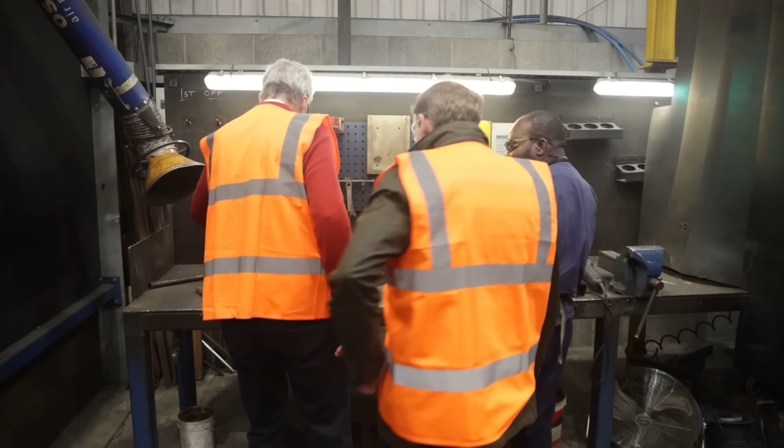He's hot, I'll show you one. So we're hard facing these. This is another long life product. As in like hard facing, like we would do in the workshop? Yes, but it's obviously a special alloy of hard facing material. So this will probably double the life of the product if this wasn't on.

So is this a range that you would do, or is this what Lemken wants you to do? This is for the aftermarket, we don't make the Lemken. This product is sold probably to Spaldings and similar people in Germany.

You were just explaining to me earlier there's now going to be a problem potentially getting hold of tungsten, so do you think you'll see more of this next year, more so than tungsten points? I think if it continues, the farmer will have no choice because the price is going to push it past the economic stage. So I think probably the cheaper, longer life coatings, which you'll probably see later on, will play into our hands. We might end up having to change a few more points this year just because of the price differential. Good for you, bad for us.

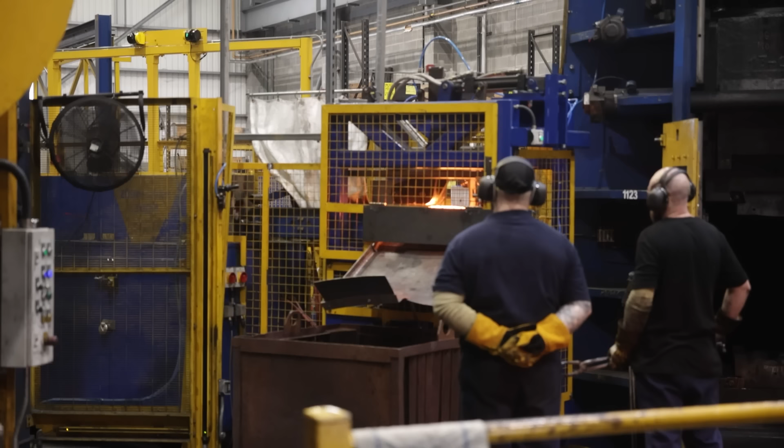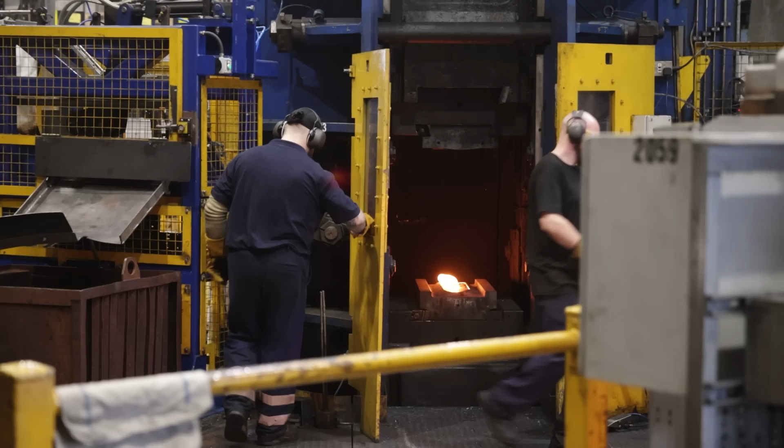So Ian, what are we looking at? It's about to drop down, that's a 50mm round billet, we call it. What temperature has that been heated to? Around 950 degrees. So you're buying those in that form? In long lengths. Now we're going to see the press, that's one hit.

And that's just compressing that into a mould, compressing all the steel into a flat shape. What sort of tonnage is that? Well, this is about the equivalent of 2,500 tonnes, pressure comes mainly from air. And that's got the shape, so the guy takes it over to the other press.

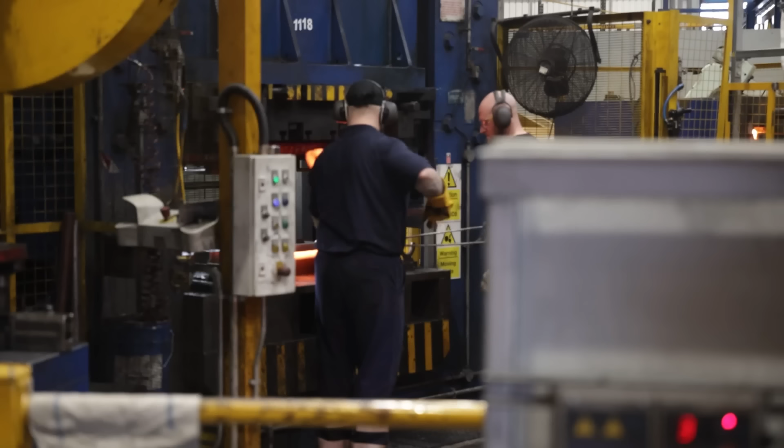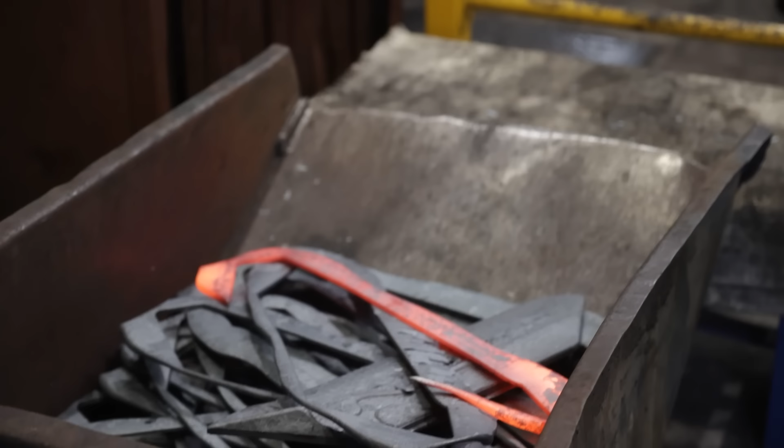What they're doing now is clipping the excess away around the edge of the profile. That's what you've got in this bin, what we call the skeleton. So what do you do with that, is that wasted? That's scrap. You can't reuse that? Well, it is reused, we sell this at about 250 quid a tonne for scrap. It goes back into the steel process.

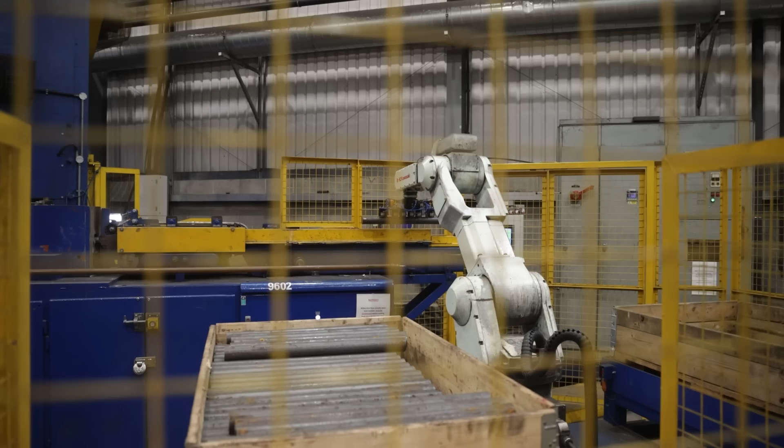So the robot is here, he's picking what we call the billet out from here. You can see he's got magnetic clamps on there, so he's waiting now to drop it onto the production line.

This is the whole induction heater here. What, just in those boxes? Yeah, that's the electrical. And what is causing the heat, induction? So it's basically heating from the inside of the steel outwards, like a microwave basically. But where's it getting its power from? From the electric.

Is that a limitation in expanding a factory for you, to be able to have enough gas and enough electric? Definitely. So have you had periods where you've actually struggled to grow because there hasn't been enough of the two main sources? It's been a bit tight now and again, yes. But there's less manufacturing going on, did that release you more capacity? We're using more because people are no longer in the region, in this particular area.

And you've got a lot of good skilled people in Sheffield, I would assume, to be able to employ. We have a huge infrastructure of both people and services, so anything that needs repairing, it's fairly easy for us to find that contract to repair it quickly and easily for us, because it's a culture around here. So that actually makes Sheffield a very good manufacturing place. I would say we're one of the best in the country in terms of the infrastructure and support we get.

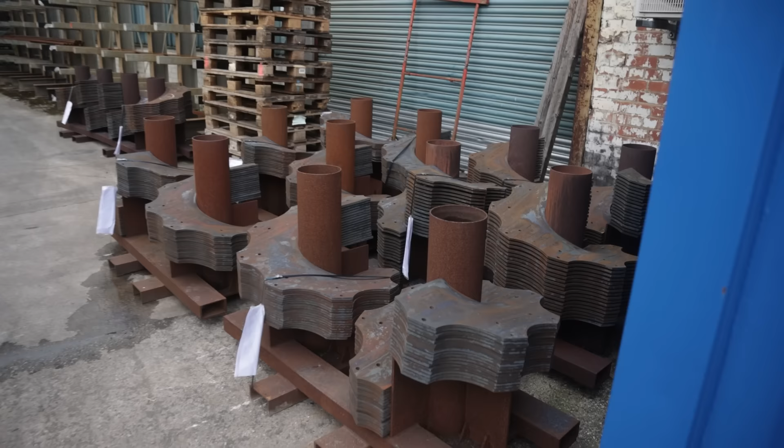Yeah, interesting. These are for the muck spreaders. So the customer welds left and right together to create the spiral. All these are hardened parts. So this would go on, say, a Bunning or a Richard Western muck spreader or something of that order. Yeah, I think these are Bunning.

And then these machines, I'm assuming, are going all over the world, are they? To go America, Australia, South Africa, you name it. And so that part, do you make the shaft as well? No, so you make this part, and then that goes to them. They weld that on. Yes. And what's so special about these?

Well, these are through hardened boron steel, 30 carbon. So compared to an unhardened part, these will probably wear 5 times longer than the hard steel. And it will take the abuse of rocks and things like that. Yes, they don't bend. The customer now has no problems with stony conditions.

And how did you end up getting that contract? About 18 months of painful development. Oh, really? Yes, to try and design it to make it work? Yes, to make it work.

And to develop that, I'm assuming you draw it on a CAD, but then was it going out onto the machines to actually trial them? No, we did what we had. The customer sent us up a long tube, the axle effectively, and then it was just trialling on the machine on and off and trying to work out how we stop distortion. That took us about 18 months to do on and off the machine.

Because the heat was altering the angles? Well, the heat would cause a problem, because obviously it's really important in a spiral that you have the flow of the muck going through, and if we didn't get it consistently right, it would stop the natural flow. So, but we solved that. It took time, but that's what we did. And now we just produce thousands and thousands of these now.

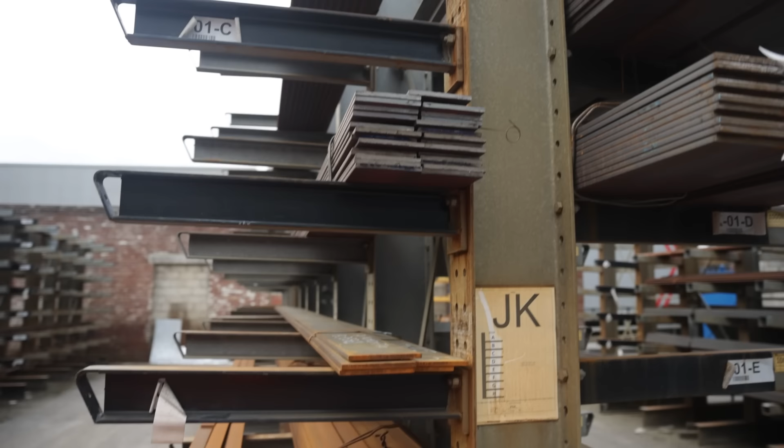Is that how they do it? They wire it up to weight? This is Spanish steel, this is Swedish steel. They're the two sort of places that steel generally comes from. Well, certainly for us, yes. And so we now have just-in-time deliveries.

And Port Talbot is closed, so you can't get anything from there. No, closed. So that means you've had to go internationally to get your steel. Yes. And does Sweden, for example, I wouldn't think of Sweden and steel, but do they have a roaring business over there in steel? They're very big steel producers.

Right. And very specialist, because that's what we're looking for. We're looking for high quality, consistency in our supply chain. You can deliver on time, good price, but also high quality.

So now that you've got a war, have you got a problem with steel coming from either of those two countries? Not in terms of supply, but definitely in terms of price. Oh, so the price has jumped? Is jumping up, daily, continuously. Because the biggest cost in steel making is now energy. But is energy as bad in Spain and Sweden as it is in the UK? We've probably got one of the highest costs of energy within Europe.

It's more painful for us because we've got so many government levies to develop nuclear and also decommission the old nuclear plants. So we've got quite a high duty or tax on what we pay, particularly for electricity. It's painful, and it just leads to a lot of uncertainty.

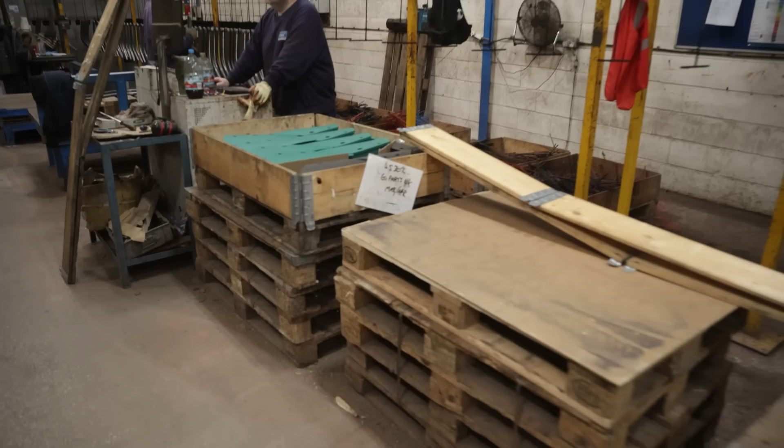So these guys are putting the materials on the racks, and then these are just going along and dropping in, coming back up. Do they go to get baked or heated or something? Yes, there's a baker behind here, it goes round on the rail into the oven, baked at about 180 degrees, and then cooled off.

By the time it comes off the line, it's obviously dry for the guys to handle, not too hot either. No, they've got cooling fans. A lot depends on the ambient temperatures outside.

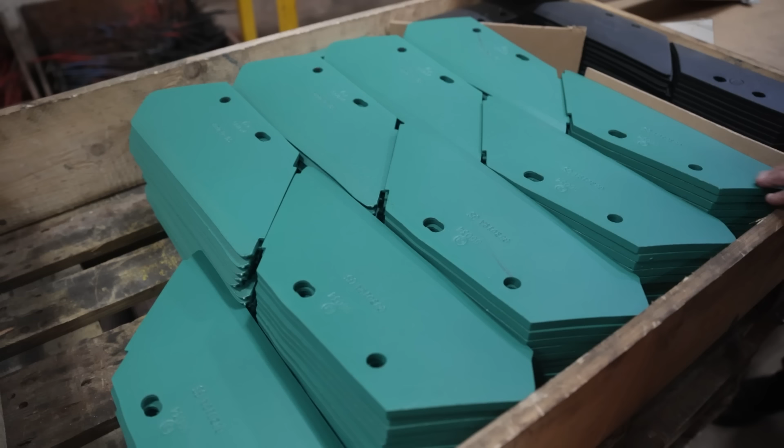And that is effectively a finished product. Yes, and then where do the quality checks happen? We have a final inspection check, so before it's sealed up we have a guy who comes to check one, probably in a pallet, and he'll just do a vernier, but most of the checks are done during the production process.

So we've got a G there. I think it's a G. Yeah, it is a G, that's aftermarket. These are all aftermarket. And that colour was out of Kverneland colour. Yes, that's Kverneland. That one I think is Kuhn. And is that going to get painted, or does only the OEMs get painted?

No, everything's painted unless the customer says don't paint it, just to stop it going rusty. I suppose appearance at the farm is reasonably important. I don't want a rusty old ploughshare. Well, if you buy a new car, it doesn't turn up full of mud, does it? No, that is true, it does a week later.

How many customers would you have? We've got about 120, all in agriculture. You wouldn't think there was 120. Well, go around Agritechnica and it's fairly mind-blowing to see how many there are.

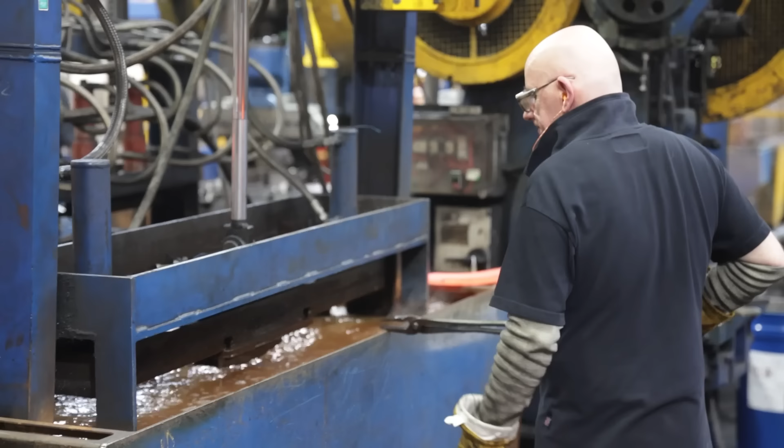A lot of equipment in here, but it's all blue and yellow. Have you painted that, or is that one make? No, when we had the fire, we repainted all this as part of the recovery program - house colour is blue. All the presses are blue, and anything important health and safety wise we painted yellow to highlight it. And how is this 950 again? Is that the heat you need to make it? Well, we set them at about 1050, so they come out at 950.

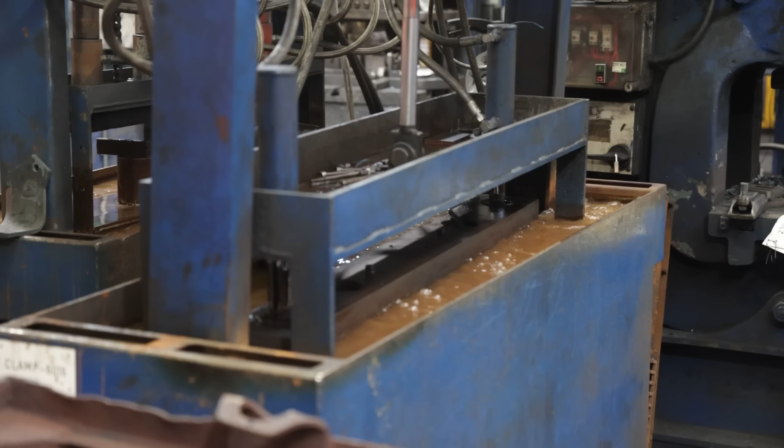And then basically pressing it into the shape that you want. This is the water I was telling you about. So what we're doing there is holding the component within the tool to stop distortion. Oh, so it's not pressing it, it's just holding it? Just holding it. So if you put one of these parts in without that tool, it wouldn't come out like that - it would come out like a banana shape. So you're going down from a temperature of about 900 to lukewarm in 20 seconds.

So do you put the holes in afterwards? Well, on this particular component, the customer - this is what they call a bolt-on part - they have an assembly welded on the fabricated assembly underneath, and this just sits on top.

Let's go to a customer in Holland. Oh really? Yeah, so he loads one in and he takes one out, and so on. Okay, so it's just like a bread oven then, he just keeps doing that. And the nice thing is that the furnace feeds the man, the man doesn't feed the furnace.

For all the production facilities we have here, you'll see these little platforms on the floor - these are scales, measuring the weight. So every time the guy puts a part in there, the scales will measure - in fact, the weight of the whole cylinder has gone up. So this is like productivity. Oh really? Yeah, we have scales everywhere in the factory. It's called a data retrieval system. So that's how you do it, through the weight.

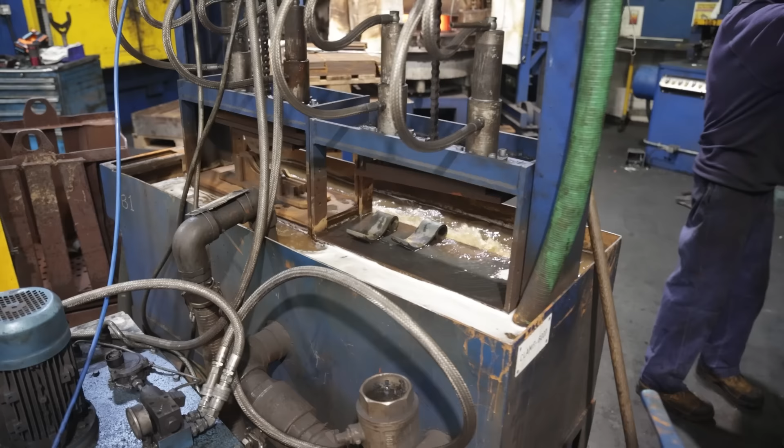This is what I was telling you about - the water is pumped, completely networked, it's in the ground. We've got about 4,000 litres of water sitting there. From the roof? Down below. Does the water come from the roof? No, we have to top it up every day. It has to be clean, so we could filter it, but that costs money. But basically all this is pumped into here - we're measuring the temperature of each cell with water. It has to be a certain temperature, so we control the water in every tank plus or minus 2.

Where's the wastewater go? There's no waste, it's just continually going round. So the only waste we have is through evaporation, that's why we top it up. And that's a rotavator tine, is it?

That's a flail, potato flail, it goes on and cuts the heads of potatoes. Okay, yeah, what's that? This is the Durafacing.

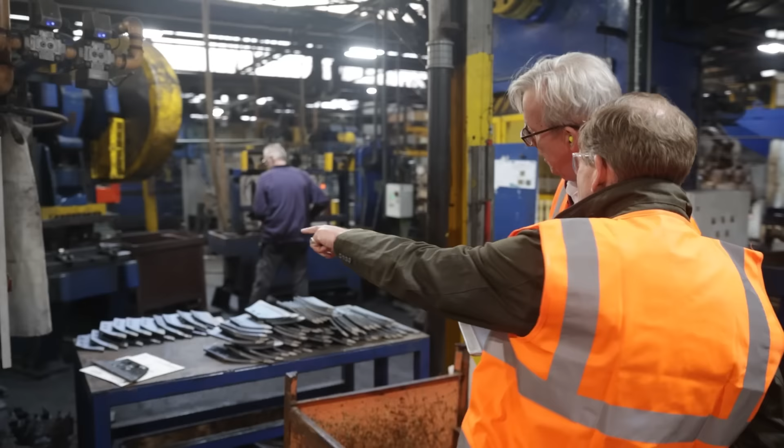This is going through the final heat treatment stage now. The key benefit of this process is that we heat treat right at the end. That's been put on, he's now putting it back in the furnace, and then putting it back in the water to cool it.

So this is a hardening stage. Yes, that's the hardening, and that's hardening the slurry basically, and it's hardening the parent section as well. So how do they put that on? I'll show you later.

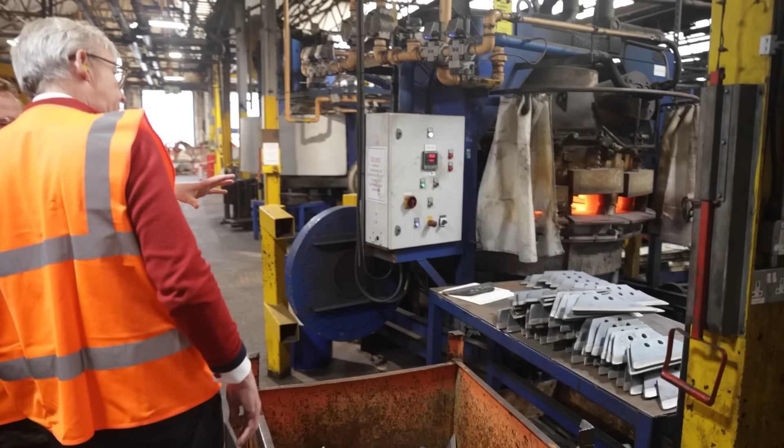When he's done that, is that a finished product? Yes. Or will that get painted? This will be shot blasted, then painted, what you saw earlier. There's a lot of manual work in this - a lot of manual work.

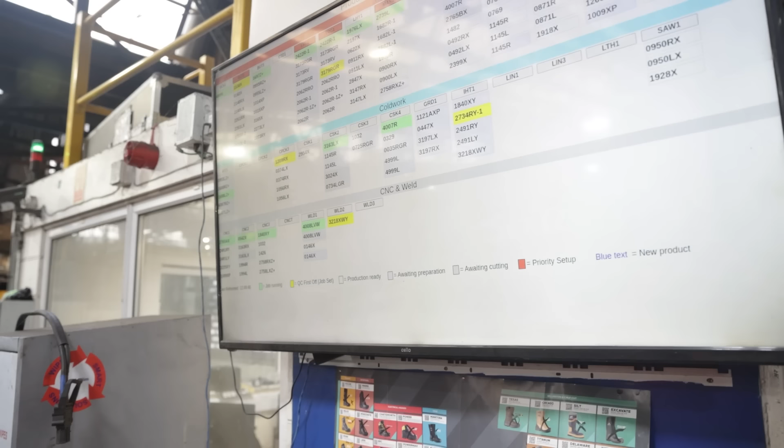So all these colour codes tell you what's going on. I like to see the green, I can never tell the difference between green and yellow, but I want to see the job running. You know you're making money when it's all green. I don't want to see red. You don't see red, no - that means shut down.

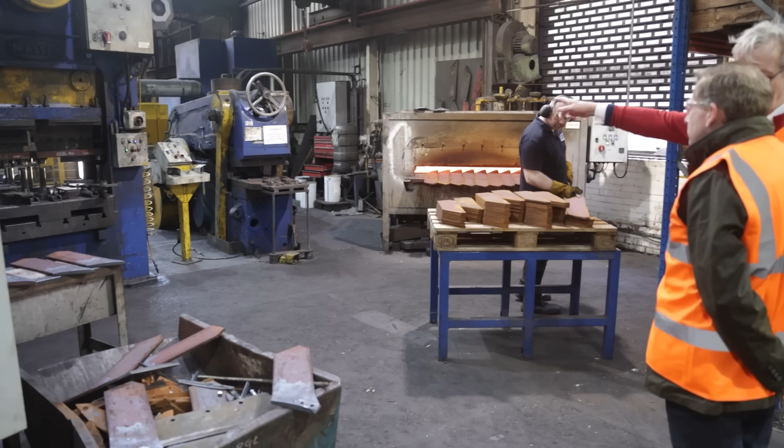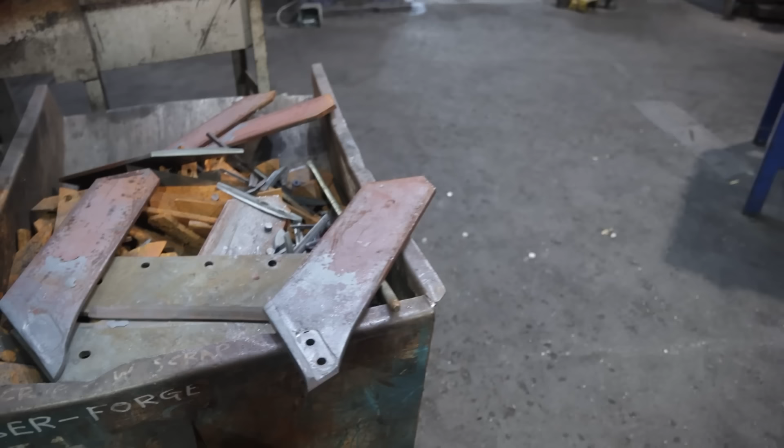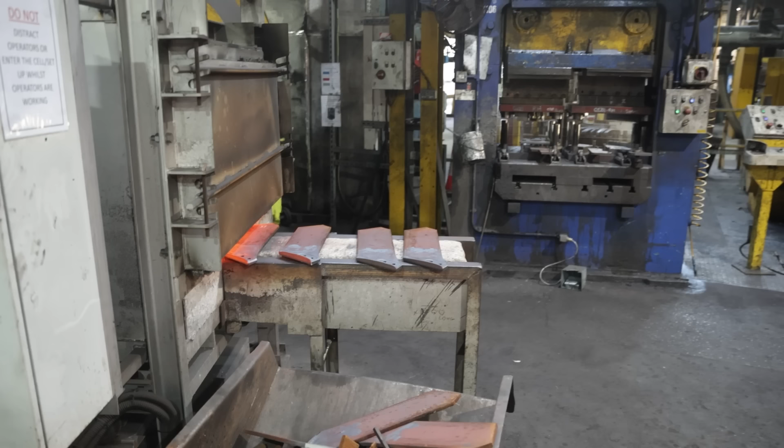So here is the horizontal forge. What we're doing here is forging the end of the cultivator share like that. We only heat up the front nose to begin with. Then it goes into a second heat, which the man here loads to be finished off in another cell next door. Right, so he heats it on that, puts it into that, presses it.

Then he punches the holes, and then puts it on. The man loading it, he loads the... right, this is for hardening.

Yes, this is what we call a walking beam furnace. You can see it just sort of going like that, it moves it on about 50 millimetres at a time, so it's self-loading really.

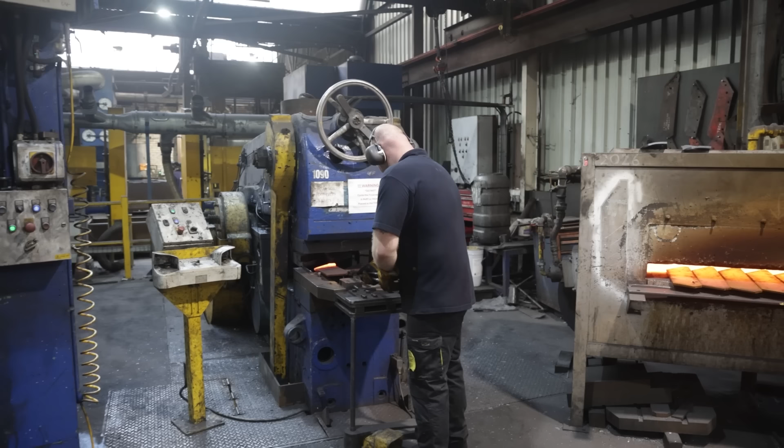You don't look like a guy you want to fall out with. That's a big boy - it's a big boy, deliberately chosen, by the way. Is that your debt collector?

Energy used to be 350,000, now it's over double. And gas? Well, that's both gas and electricity.

But there's no way around it, the parts have to get to this temperature. Yeah, you got no choice.

And then do people have to move around, some have to do the night and then the day? No, we tend to find the night men like to do nights. Whereas the morning and afternoon shift, one week you're on a morning shift, the next week you'll be on the afternoon shift. Most people would prefer to do the morning shift, because you've got the rest of the day off to do whatever you want.

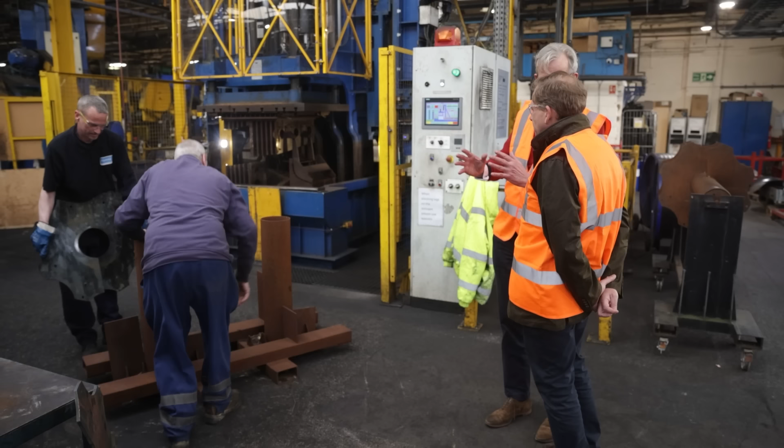After the hardening process, we do the tempering process, which, as it sounds, is the way of chilling the microstructure of the steel. It's really important we get airflow, so when they set these, we put a gap between each one to ensure the heat flows right across the product.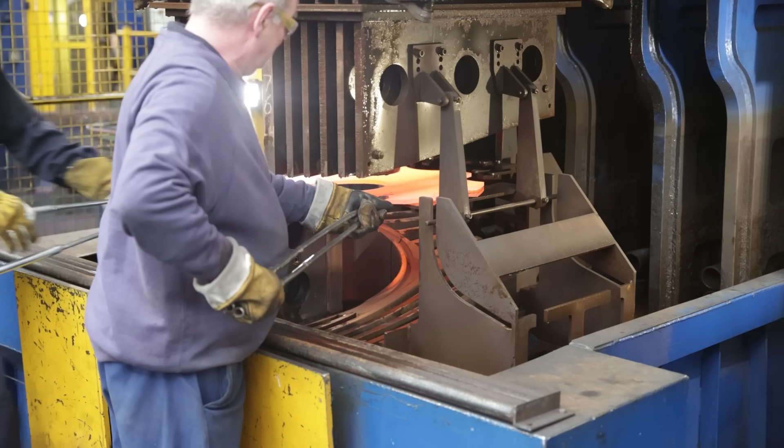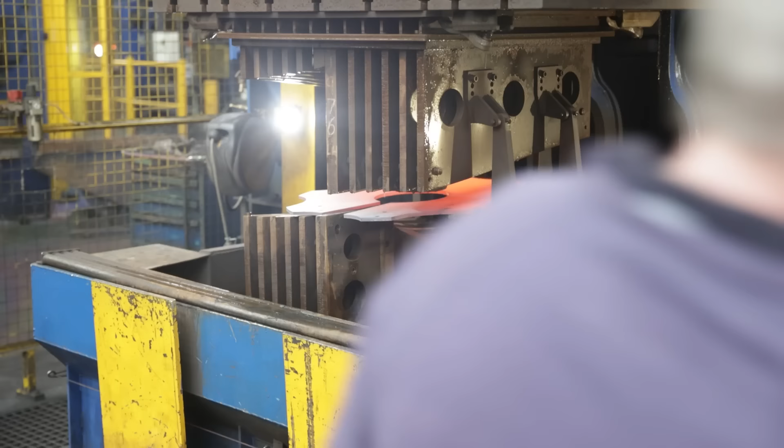So it comes out flat, and now you're going to shape it. Yes. But it's so hot, that makes it look so easy, doesn't it? Yeah.

What it's now doing is going into the water pit. We're forcing water onto the parts. Again, it's about a 25 kilo part, and we've got to make sure we cool it in about 20 seconds. So we have to force water through the tooling to ensure we've got the 20 seconds.

Heat treatment is the first part of the cooling process. We need to get it down within 20 seconds to below 300. That's all we have to do, then we don't mind after that. So you'll take it out at 300 C? No, we'll come out at about 60. Oh really? Yeah, they may even be able to handle it. I'm assuming this is measuring the temperature, is it? Yes.

Is it fully automated then? Will that come up when it's ready? Well, we built all of this ourselves, the whole unit. Designed and built it with the help of the university - Sheffield. They've got a very good engineering side at Sheffield University, fantastic engineering, absolutely fantastic. And we worked with the AMRC, the Advanced Manufacturing Research Centre, on the other side of the city, basically to do all the modelling, because what we're worried about is have we got the strength within the whole structure of the machine to cope with the forces involved here. And it took us about a year to convince - this is part of your 18 months trying to get this right.

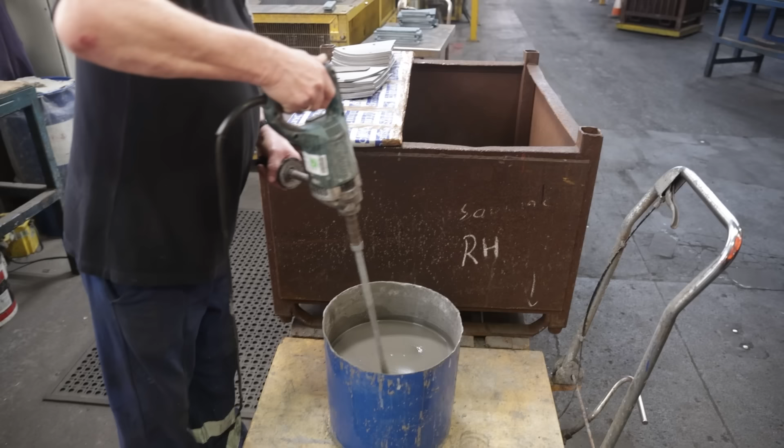Is that the slurry you talk about? Yes. So we buy a powder with a secret formula, chemistry, and then we add water. A bit like making the icing on top of your cake. So we make all that, we do a couple of tests on there, we hand dip it, and then it goes through an atmosphere controlled furnace.

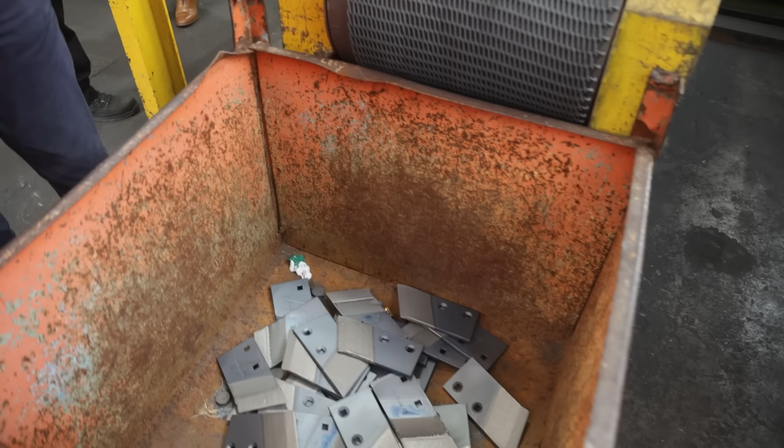So it goes through, each box has a different atmosphere, then there's the cooling one. So it goes through 3 different types of atmospheres, then finally to the cooling process. So we get to the other end, it's coming out. So that's now baked on? Yes. So is that going to give it 5 times more life, or? No, this will probably do 2.5 to 3.

And cost-wise, for the farmer buying that, is that like 1.5 times, I would say? They probably get 1 life free. And you're making your saving not only the life, but it's also the time in changing. That's the key, really, is the time.

I've actually never seen it. Oh, really? No, I've never seen it. There's no easy way. You have to be prepared to work with the customer to find out what's the best type of pattern to help the wear.

So what do you call that, is that the Duraforce? They call it Durafacing, yes. They have their own slight recipe that they have, which we work to. We have our recipe. But in principle, we have to develop the pattern of the coating for each product. So the first thing we'll ask for is, please send us the partly worn component so we can have a look at where the wear is starting. Oh, clever. And then we say, give us a fully worn one. That's how we start the development.

So did you develop this? Yes and no, this actually is an American coating, invented by Ingersoll in the States, mainly for this. And it came over here, and the company who was doing it eventually sold the plant to us. What we've done is refine the recipe, both of the powder and the processing, to make it more effective. That's what we've had it for, nearly 30 years. Oh, long time. Long time.

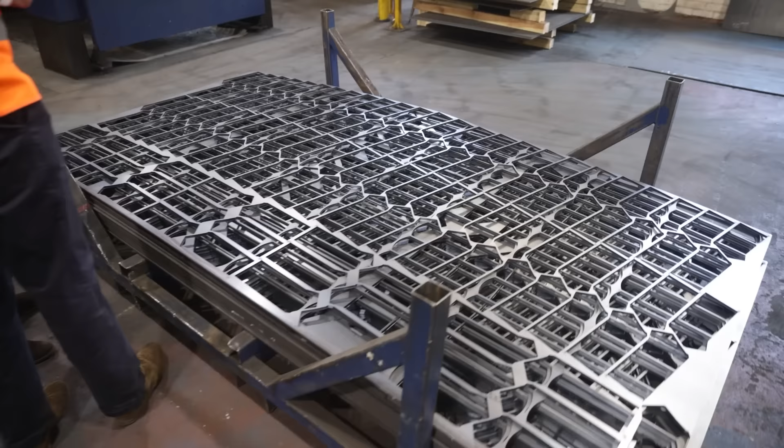Earlier you saw us with the bar product steel at the other end of the site. This one is what we call hot rolled coil, which is then cut into lengths. This is what we call the skeletons. I always like to see this because there's hardly any waste on here at all.

I'm assuming you've got people trying to work out how to maximise the amount of steel that you actually have delivered to go to the stage before it breaks and fouls you up. Yeah, all these would be - we have a template the designers have to use, so here will be a set gap. Maybe I don't know what thickness this is, probably 12 mil, so you're supposed to have 1.5 times the thickness between each piece. And then this is just going off to the scrap man, and they're doing whatever they do with it.

So the steel would come from abroad. Yes, you'll make your product - the scraps then go into a melting pot, to remake sheets of steel, and then they're back out to industry. So it's basically making that 5 million you spoke about. Is that based on the scrap or on iron ore? It's a good question, I can't say because I don't know - they don't break it down like that. In the UK we've been traditionally iron ore based, at Scunthorpe and at South Wales, but eventually I believe it will all change to scrap based.

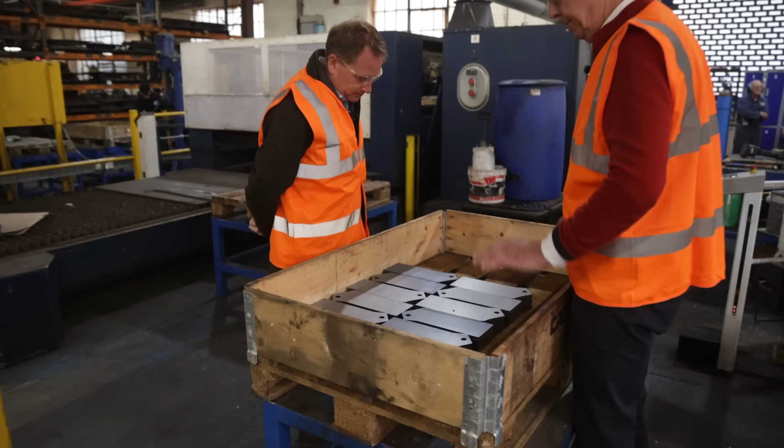We'll go and have a look. So this is the pieces that come out, and the great thing about laser technology now is it's so accurate. And you haven't got sharp edges or anything - no sharp edges, there's no burrs. So it effectively makes you a clean piece of metal. Absolutely, and accurately - the whole positioning is absolutely perfect.

And what creates a laser? This isn't air, is it? It's basically through electricity, isn't it? Right, and a gas. So there is actually a gas involved as well. So it's effectively like plasma - that's what it runs on. Yes.

As usual, so there's something like 500 pallets of tooling here, all barcoded and positioned up where they are. Every job, 90% of the work we do here, has got to have its own tools. Did you make the tools? We make it here. So you have to have some guys who, if you get a new product line - that's what you'll see later. But yes, all this is designed and built here. Everything. Yeah.

And that's always the issue for the customer, he's got to invest in the cost. On average, startup cost is about 2.5K to make the tooling for an average job. So he's got to have a proper run through of stuff to pay for it. But the OEs are very good, because if they believe in the product, it's going to work, they'll spend the money and do it. So it's an investment, really.

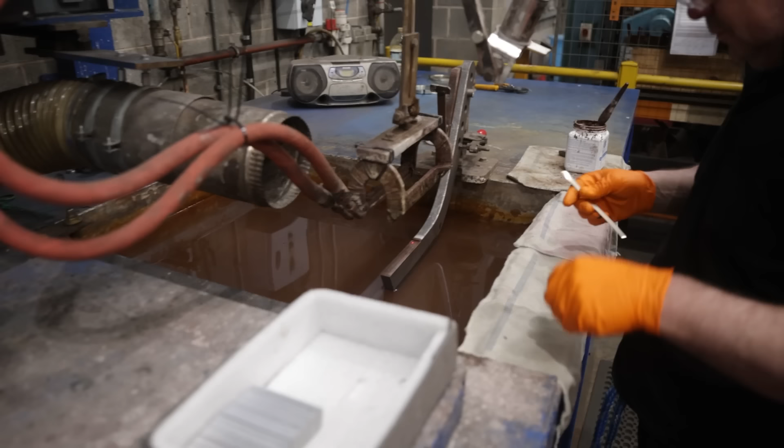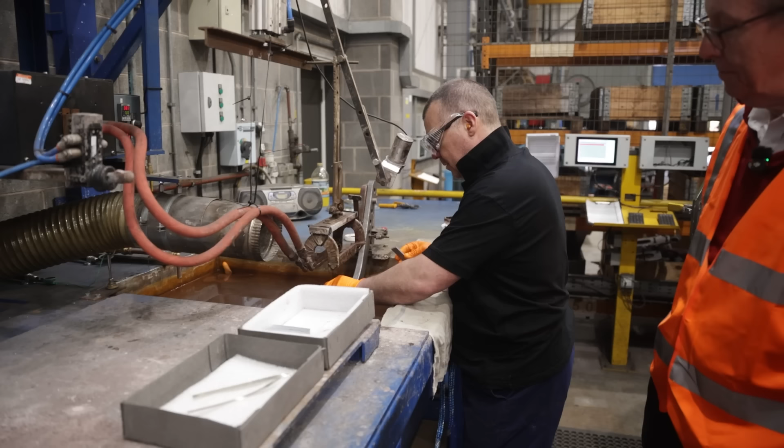So the braze is effectively your super glue. Yes. Which Granny invented, no doubt. Does it have more than one element? Yes, there's two different elements. So these strips are also tungsten, are they? No, this is the actual braze material itself. There's two different elements.

So here we're using induction heat to melt the braze. This is what we call a coil, it's in the shape of the part. So this is heating it up now. So the very thin strip is melting, is it? Yes, and that's bonding the bottom and the top. It really is getting hot now.

Again, this is quite a time-consuming thing to do, isn't it? It is. That's one of the issues here, we also have to machine the pocket that the tile sits on. We do that for a number of reasons, to make sure the tile doesn't fall off, and also that the tile seat is absolutely flat. You can imagine if the seat pocket was like a radius on it, it would eventually fall off.

So if you get a tungsten where it falls off, it can be that the brazing effect has just not been done correctly, and it could be a number of factors - still not shot blast right, it's got oil on. When we were first developing this system, maybe 15 years ago, we learnt the hard way. We did have tiles falling off, and we kept working out why and how. Eventually, you keep reducing the number of risk levels.

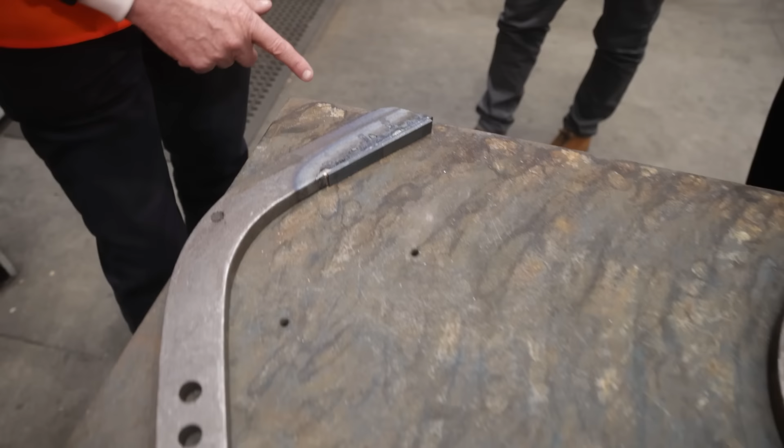And then when he's done that, he cools it. Yes, and you don't have to reheat to cool again. No, that's it. You can see here, this is the localized area of heat.

So that's why we can see here the water line where we've kept it cool - that's where a lot of the wear happens when you've got the tiles on. And you don't put anything on the side?

No. And then this is going to get painted? Yeah, so this would then go off in a batch to the painting bay where we've already been, they'll do that and off it goes. Why do you not do the sides? You've done the research and found there's no benefit? Because that's how it ends up.

But some customers will do something like that. Others have their own ways of testing, and in this particular case, they don't like anything on the sides. So if I now went to hard face that in the workshop, would I then knock the tile off? Yes, absolutely right, because of the heat. I'd worry if you were doing hard facing, I could ruin your 10-year success rate - start telling you your tiles are falling off, you send it back to us and say it's wrong, and you go, what's that dodgy old stuff on the side?

Got it. When we temper, that's around 200 degrees. When you're hard facing, you're about 600. So it means you're tempering the whole of the part back, or the area where you're hard facing. So what you gain is often what you lose. Yeah, that's the problem.

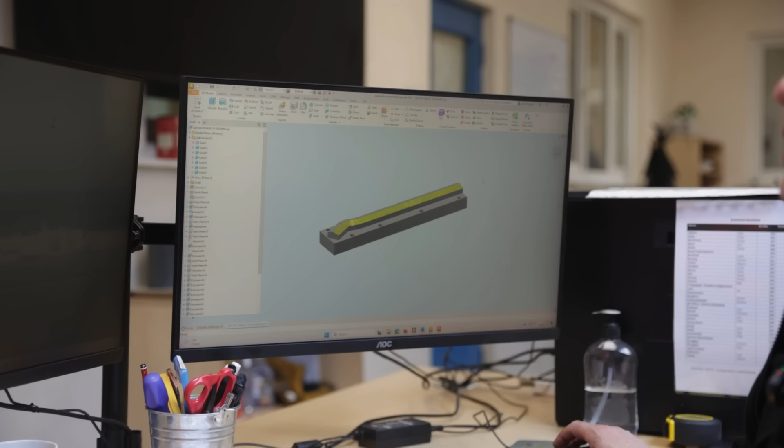So did you guys come off the floor? I did, yeah. Making in the forge, making things, and then made it into here? I just came off the shop floor. Originally, before I came in here, I came off the shop floor. But you had a keen interest in design? Yeah, I worked obviously on the shop floor, then I moved on to the tool room, onto the CNCs, and then got more involved in design, then came into the design office.

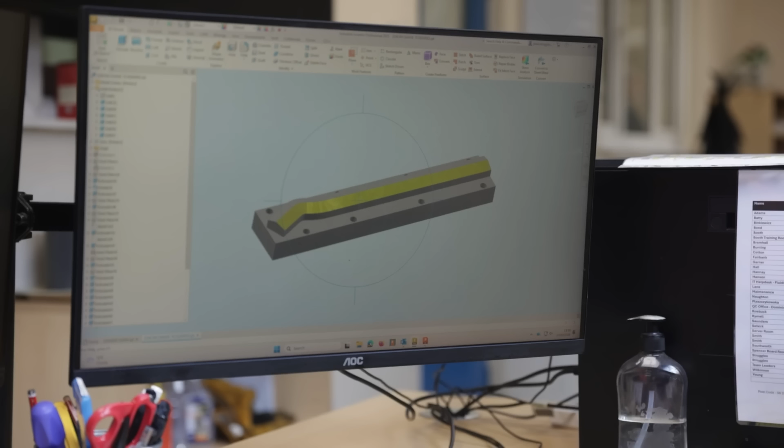Ian was just telling me that if you don't get the tooling right, you've just got a bad product from start to finish. Yeah, definitely. So this one that we're doing here, this is a swage tool for a new job that we're looking at. So what we do is we've done the model of this swage, and then I export that as an IGES file.

What do you mean, what do you call a swage? I'd have to show you actually, the swage of the part. So what we do is this is a swage tool of the part, and then what I do is I convert that into an IGES file to bring it into a different software, to machine it.

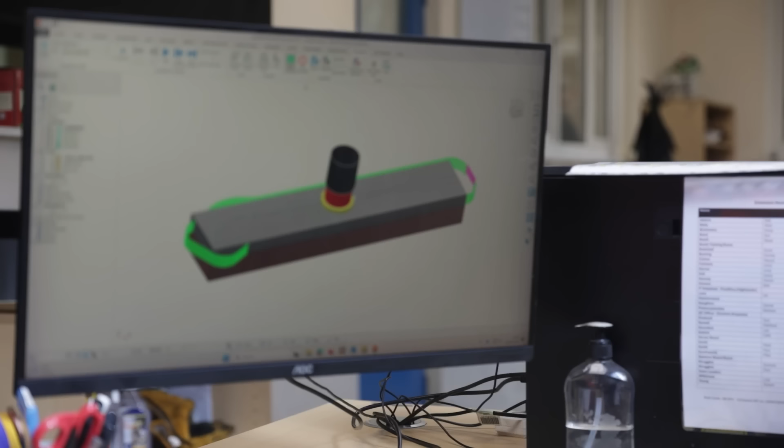So anything that somebody wants making, basically they would come here, and then you would draw it up? Yeah, we draw it up. And at that point then you get the tooling made to suit it. Are you designing the tooling to do that? Then they go and make it physically. And then how do you measure what they've made? Have you got another scanning system which is scanning it to make sure it matches?

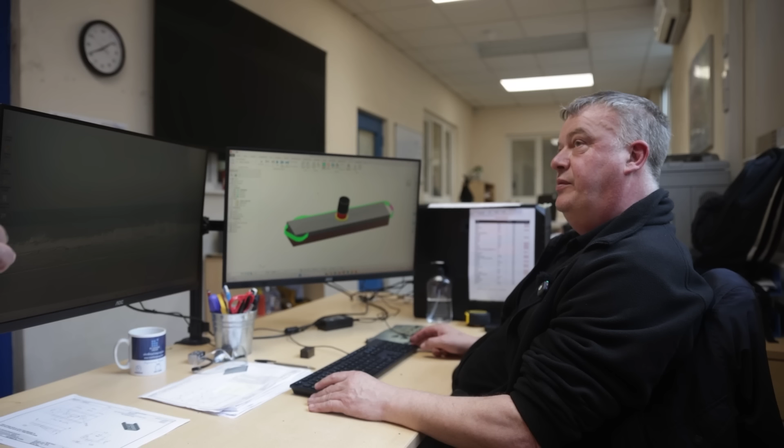We have a scanning system, but you can just use the probes off the CNCs to get the measurements of what we've done. And then after that, it goes into manufacturing? It goes into development, so you'll go and trial it? Yeah, we're going to trial it on the press, see if it needs any alterations. If the shape needs slightly changing, we can change that. So what we do is change the DXF, get another one lasered, and then the next attempt.

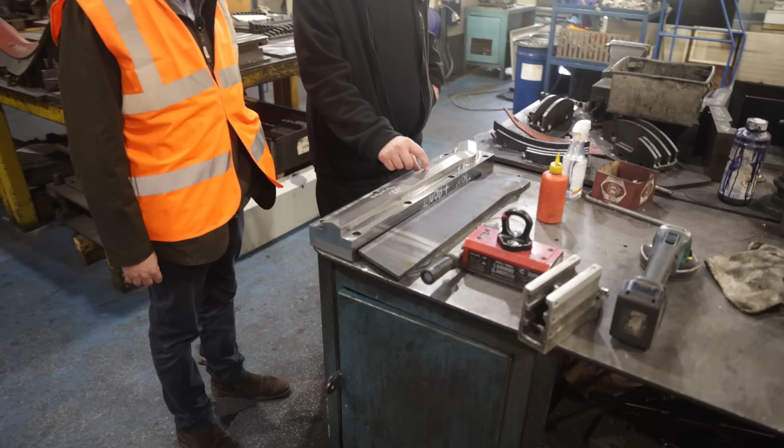When you talk about swage, you mean angles? Yeah, I've got - this is obviously formed, that is what you get on swage. It's more or less different to a machine. If you machined it - but like I say, a lot of customers prefer the swage.

So you guys in here are just basically doing the design for the entire factory? Yeah, they check that what you're doing is working out. They'll look at the graphics of the machine, then look through the program to make sure everything's okay. Then we machine it and check it with a probe to make sure all the sizes are correct.

Do a lot of you guys all come off the floor? I come off the floor, Chris has come off the floor. Bob originally came from the tool room, he was in charge of the section, and he's moved up to design engineer as well. So you can't just come straight into design? No, you typically work your way up into it, because with your product knowledge, it goes a lot better for you - you know how parts are made on the presses, so as you're designing, you know which way is better for the operator to get hold of the part, and which way the tooling should go.

Have you got children coming into the business? No, building business. Oh, building? Yeah, building, okay. So both of them into building. You're born and bred Sheffield?

Yeah, I've been around the world. I've worked abroad, in Bulgaria, Istanbul, and I came back to Sheffield in 1993. I've done a bit around the world - razor blades actually, I used to be a razor blade technician. What, for shaving? Yes. Really? You were Mr. Gillette, were you? Well, we did have a competition with Gillette, and we actually won the big order off Gillette - the sizes were a lot better. We were the first company to do the lady shaves back in the 19... We've all got a lot to thank you for then.